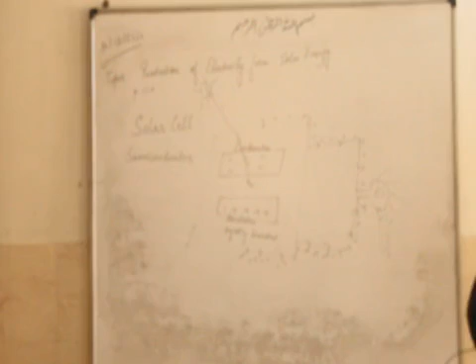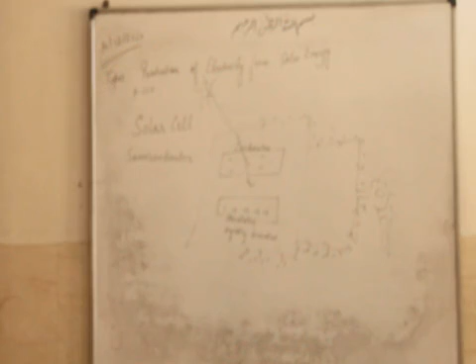In solar cell, they are using battery for storing of energy. Okay, here I use a bulb so that you can understand that it is producing electricity.

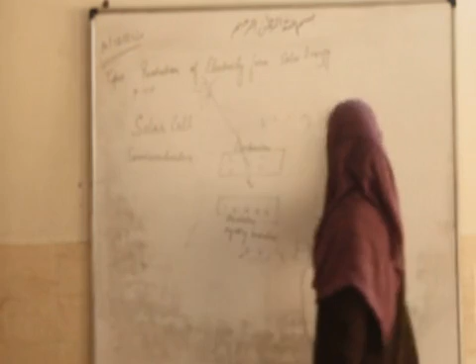So moving on towards the next topic, that is wind energy. So in wind energy, what will happen? Tell me students, wind energy you have already studied. So what's happening? You are using wind energy for moving of these blades, and what happened?

A generator is attached. A generator, you can say a motor, is attached, and then it is generating electricity. Which is generating what? Electricity.

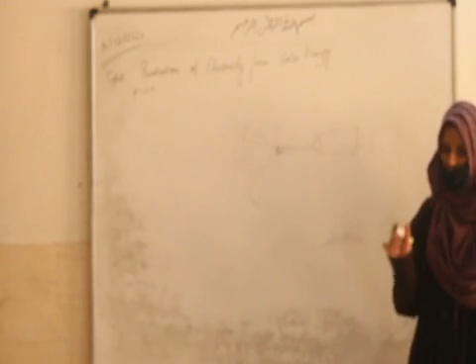Oh, diagram is very bad. Okay, fine. So you can see here in your diagram that where they have made generator, so they made this. What is this? Can anyone tell?

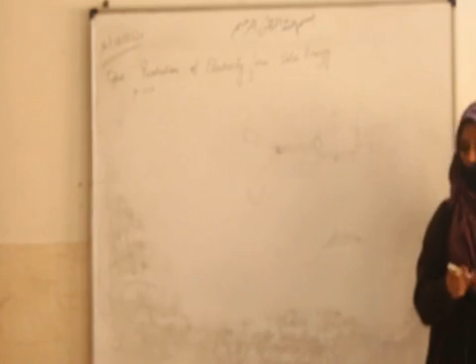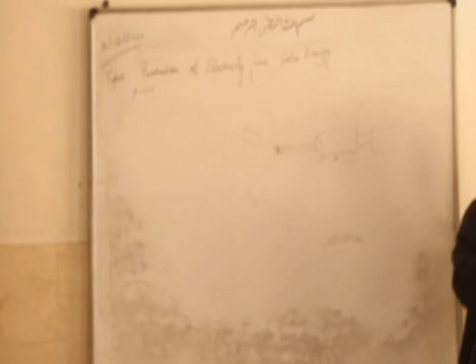Magnets. The work I just told you is that if you keep a wire between the magnets, then it produces magnetic field as well as electric field. And because of these two fields, what we are getting is induced current, that is your AC current only. Whenever the term induced current is there, that means they are talking about AC current.

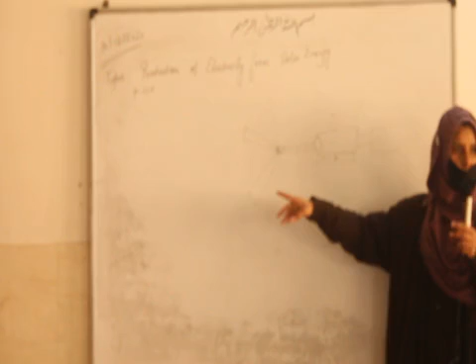So what happened actually? The magnets are there when wind energy, because of the wind energy, the flowing wind, or you can say wind energy, the turbines are able to move. When the turbines are able to move, there is one pipe which is attached to this shaft.

So what happened? Because the turbines are moving, they create a rotational motion. You can say rotational energy will be there, and that's it. This means the shaft is continuously moving, and that shaft is attached to this generator.

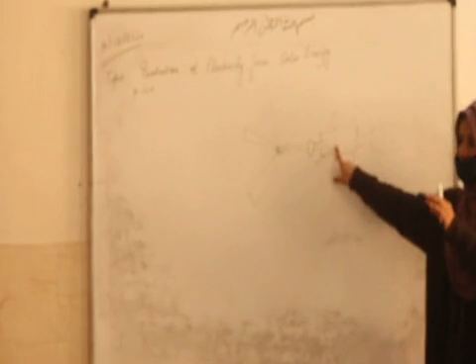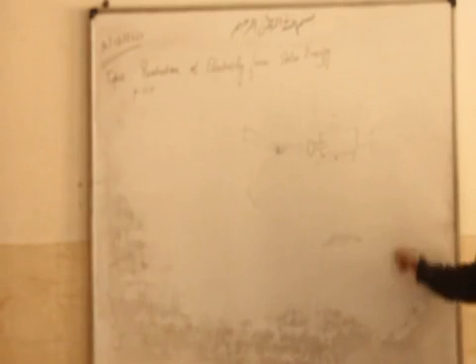And in this generator, what's happening? There is a coil inside the generator. If we're talking about the generator diagram, if I expand the diagram of generator, then it will look like this. One wire is there.

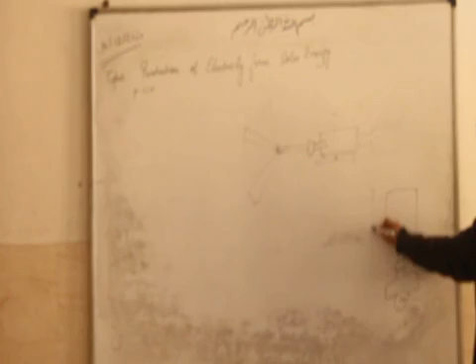Here this shaft, one minute, and here it is galvanometer. And here magnets are there, North Pole and South Pole.

So that magnetic field will be created, and because of this, these coils are continuously rotating because of the shaft. You can understand this rotation.

Like coil is there, rotating means what? This side will come here, and again this side will come here. This is only going on, and because of this, an induced current is produced. Why? Because now here we are actually applying Fleming's right-hand rule like this.

It is there, and I think it is there in 10th class. I will explain inshallah very properly there. But try to understand here the working, how this rotational energy, from this wind energy, gives us electricity.

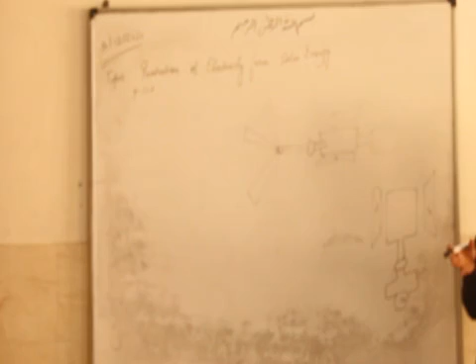So because of the generator, and knowing just that it's the generator is not enough. You should know what's happening inside the generator. So this is happening inside the generator: there is, you can say, a magnet, and between the magnet there is a wire, which produces magnetic energy, magnetic field as well as electric field.

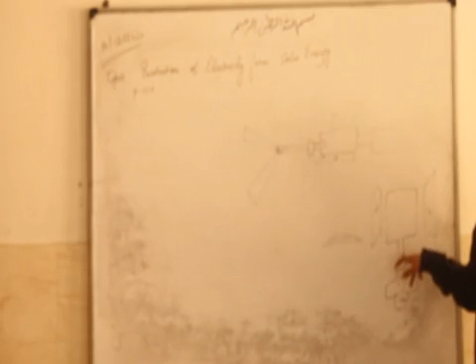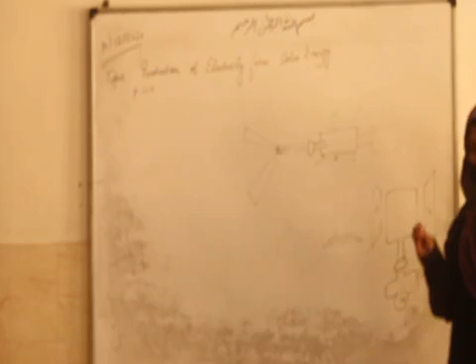So this is the only concept we are using here. When you keep an electric wire between the magnets, between the magnetic field, just think how much disturbance it will create, or you can say it will create movement.

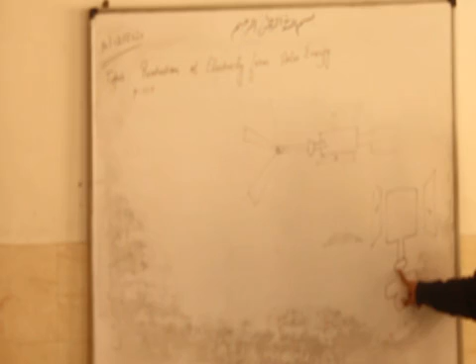It results in the movement of the wire. Wind energy is moving this shaft, and this shaft is moving this coil, and because of this moving of the coil, an induced current is produced, because this coil is moving inside the magnetic field area.

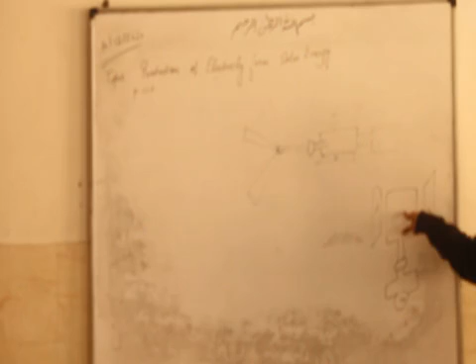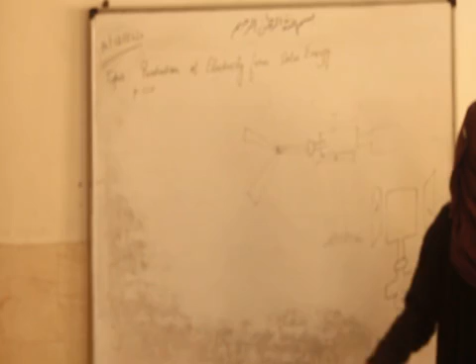Okay, see, your area is there. If anyone will come to adjust in your area, he or she is supposed to do too much hard work, because this is your area. You are not allowing anyone to come in your area. But if he or she comes in your area, then he or she is supposed to do too much hard work, so that he or she should convince you to be in that area.

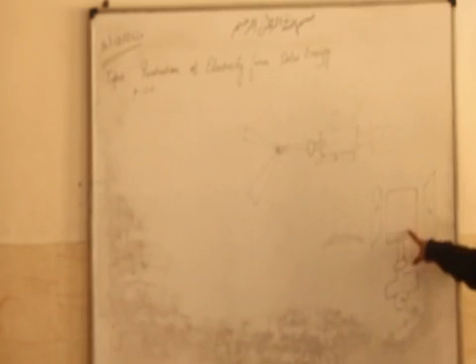Similarly here also, this magnetic field is there. In that magnetic field, the coil is continuously rotating, and is producing induced current. So induced current is produced, and that induced current is used for many purposes, by storing or whatever they are doing.

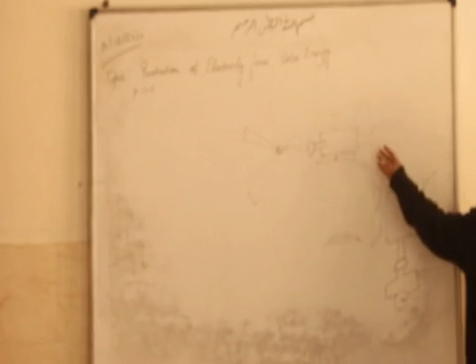In this, they read that a large number of generators arranged over a large area is called a wind farm. So in a wind farm, what's happening is that only one windmill is not enough. It will produce very little electricity. So if you look at a wind farm, there are so many windmills, and the result is that the amount of electricity produced is enough.

So this is the working of wind energy. Now read your paragraph and try to understand from this diagram. In this book, they have not explained it like this, so that's why I am explaining it, so that it becomes clear to you how it's working.

Here the question is how it's working. If anyone asks how it is working, you will say that just because of the wind energy, a generator is attached, and that's why it's creating electricity, producing electricity. So what's happening inside the generator?

This generator works on the principle that when you keep a coil in a magnetic field, the result is that it will rotate the coil. Because of the magnetic field, it rotates the coil, and an induced current is produced. Because of this induced current, we can say that the electricity is produced.

Now moving on to the next topic, that is electricity from water energy. Same thing in water energy, but which concept are we using? There is one added concept here in this water energy hydroelectric power plant.

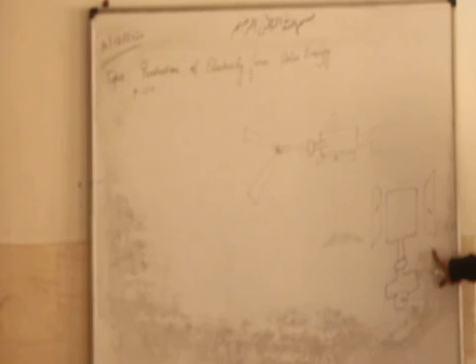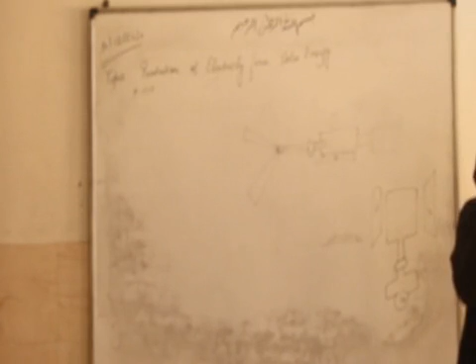Kinetic energy and potential energy, conversion of potential energy into kinetic energy. Because dams are placed at a very high height, the water has too much potential energy, maximum. So when we make a path to flow the water, the potential energy of the water stored in the dam is converted into kinetic energy, and because of that kinetic energy of the flowing water, the turbines are able to move. This is the only concept we added.

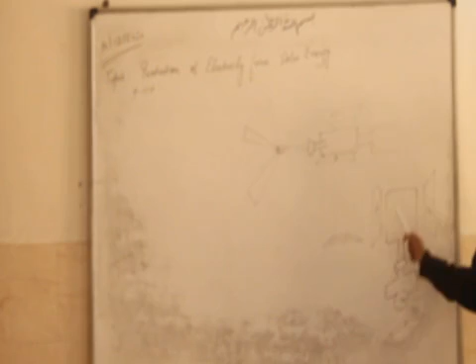Got my point? Then again the same thing happens. Turbines will move the shaft, the shaft will move the coil, and the coil moving will produce induced current because it is already in a magnetic field.

Simple. Okay, ma'am, you said that it is eco-friendly. Wind energy is eco-friendly. Water energy... is water energy not eco-friendly? Water energy is eco-friendly, yes. Why? Why not?

Many countries are counting it. Now, water is supposed to come in which category of source of energy - renewable or non-renewable? No ma'am, because it pollutes the water.

That water is used in dams, and those dams are not made properly. If you increase the pressure, dams can break, which results in floods. Marine life is affected because this water has silt, and the water heats up, which affects marine life.

What they are calling eco-friendly is based on the definition of renewable and non-renewable sources of energy, without looking at other effects. In factories, they use too much chemical energy, and excess chemical energy mixes into the water, polluting it. But in a dam reservoir, they are collecting clean water.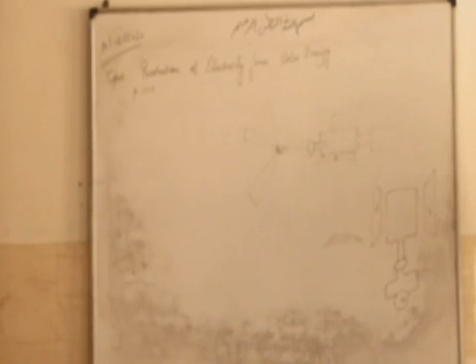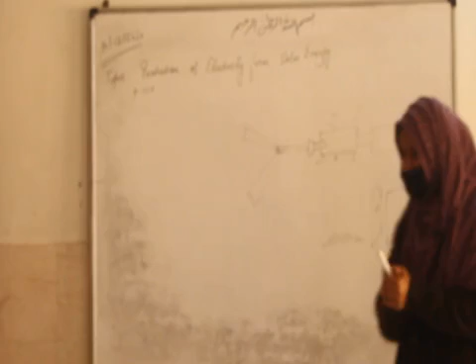That's why they said eco-friendly. But in dams it's not like that - wherever dams are, the water is not clean. For example, I think dams are there in Nainital. Are they clean or dirty? Dirty. So that means this point should be deleted from here - they are not eco-friendly.

Next is production of electricity from nuclear energy. Nuclear energy is not eco-friendly, because if any reaction goes wrong, it could take lives. Also, uranium and the materials needed require a lot of cost. In wind energy, you don't need to pay so much - you just need a generator to produce electricity.

Similarly, solar panels are costly. Everyone cannot afford a solar panel. But nowadays, thankfully, many houses use solar panels on their terraces. Earlier it was very costly, and it's still costly - not everyone can afford it. That's why it is not written as eco-friendly.

Eco-friendly is written correctly here, you are correct. But this water point - eco-friendly - should not be there, because pollution of water occurs as a result. That's not eco-friendly.

Now next is nuclear energy. Students, read this paragraph first, then I will ask questions and you will explain.

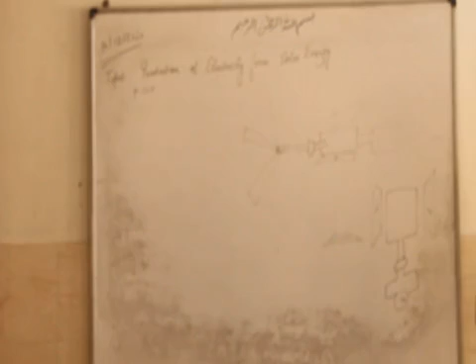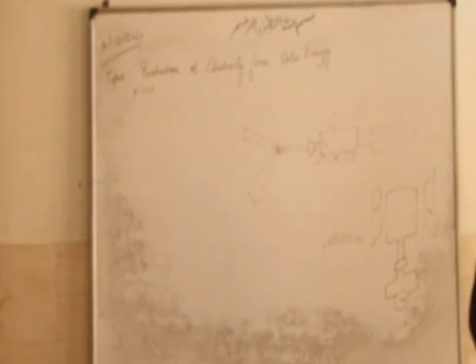Here you will use the concept of fission and fusion. So what is included in this nuclear plant - fusion or fission? Fission. Well Amna, what is fusion and fission?

Zibran, what is fusion and fission? Don't know? I discussed this with you - oh okay, he was not there that time. Silma, tell me. Fusion means when atoms, or two molecules, join together. Fission means breaking of the atom - when an atom breaks into two or three forms, we call it fission.

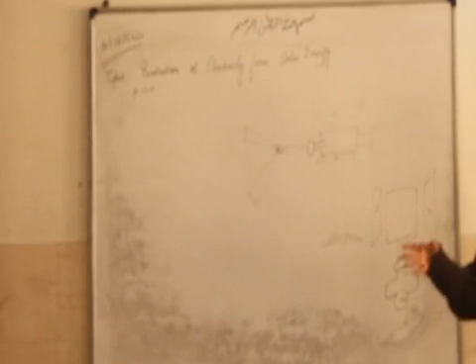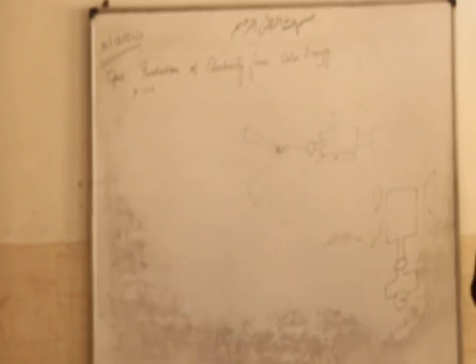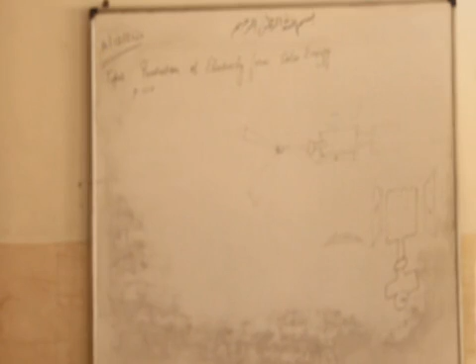I'm not getting the equation - there is one equation where a number of neutrons will be produced. It breaks into small pieces, and the resultant number of neutrons produced results in an excessive amount of energy. That's what actually happens - they use this control process. Okay, you will explain it, so I started explaining.